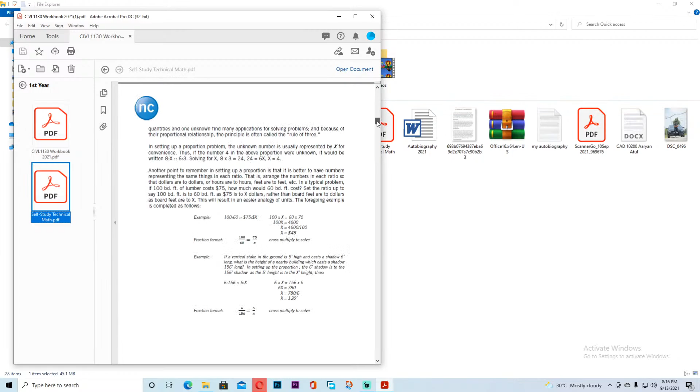They work for general contractors and subcontractors. Now, when you're working for an architect, you may not be using all the estimating skills that I'm teaching you here. You may be preparing drawings, but there's going to be many times in that role that you may be required to calculate quantities of material and calculate pricing. The other thing is, working for an architect or an engineer, you may be reviewing bids by general contractors, and you need to understand how that pricing took place.

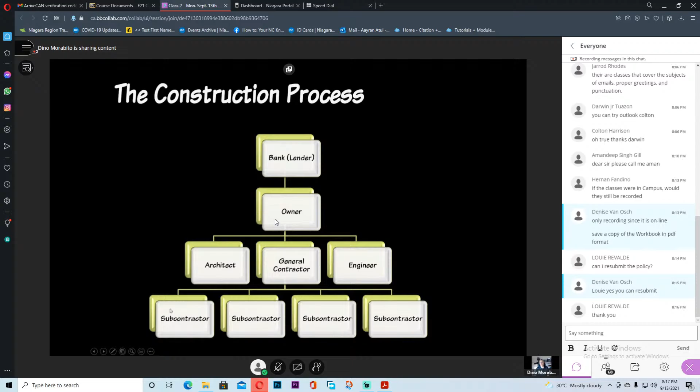So the skills that we're going to give you in construction estimating apply to every step of that chart. You can work for the bank, the architects, the general contractors, the engineers, or any of the subcontractors. There's always opportunities for us to work for any of these people in this project.

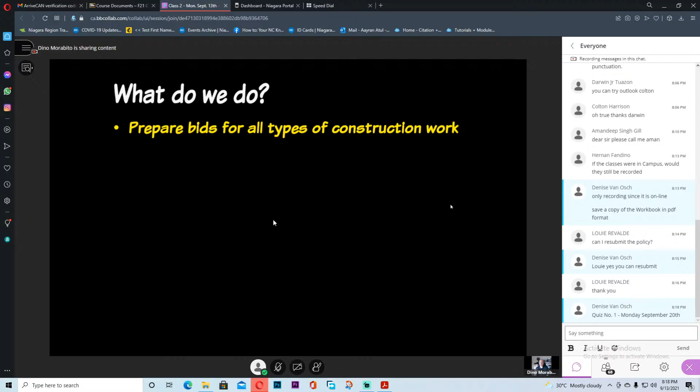Okay, what do we do? Well, what we generally associate as work with estimators is preparing bids. We are the guys who make an estimate, which becomes the bid for a project. In other words, the bid is a proposal that says we'll do the work for X number of dollars. But we also get involved with calculating the costs or the budget costs at the feasibility stage before the drawings are done, before the actual project is ready to start getting built. Someone may just be looking at a proposal and saying, hey, I'd like to put an apartment building in. How much do you think that'll cost? We can be involved in those early stages.

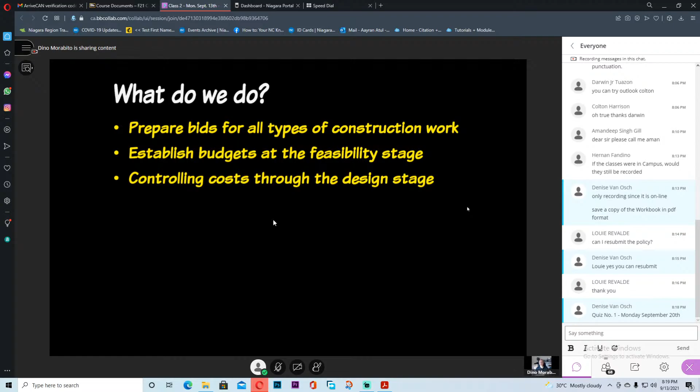When it's moved off the feasibility stage and is actually being drawn up by an architect, oftentimes decisions need to be made throughout that whole design process as to how much things are going to cost, and maybe if they cost too much, they might have to change what they're going to do. So we're involved with the cost in the design stage.

When the project is happening, we may be involved with monitoring the costs on the job week to week, month to month, to make sure that everything is staying within budget. And of course, we're always measuring quantities. Our skill set is to read drawings, understand them, and understand how to interpret that into quantity calculations.

When there are disputes, and certainly there can always be situations where there may not be full agreement in a project, where someone thinks something should cost a certain amount and someone doesn't agree with that amount, we can get into situations like that. We can get into situations where someone did a lot of extra work and doesn't feel like they're being paid enough for that work. So that's when a claim would be filed on a project. We can be involved in that process.

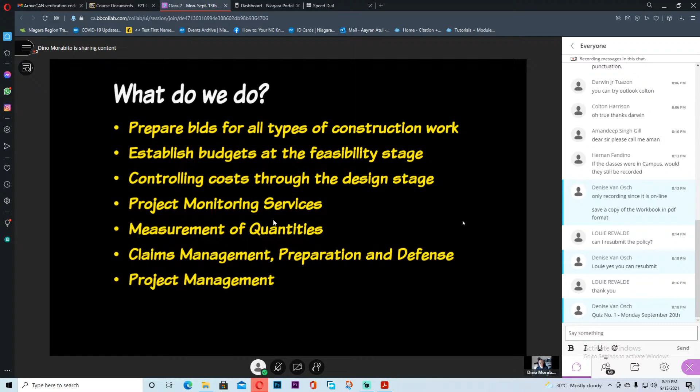Managing the project day to day. And when there's an argument or a disagreement between parties, and that could be between the general contractor and the architect, oftentimes when they're not in agreement with how much certain things should cost, a project could end up with someone saying, you know, we lost money, and we lost money because this certain party didn't do what they were supposed to do, and so we're putting in a claim for $10 million extra.

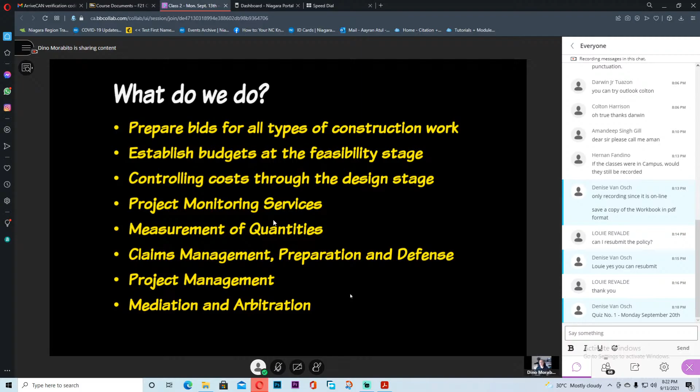Those claims need to be settled somehow, and there's a process called arbitration. In the industry, that's a process where instead of going to court, instead of being in a situation where there's been lawsuits filed and parties are taking each other to court, there can be an arbitration process where the two parties get together with an independent group, and that group looks over the submissions and makes a decision that everybody agrees to abide by. That's called arbitration. Oftentimes our skill set lends itself well to that because we understand numbers, quantities, and dollars, so we may be involved as an arbitrator, helping to mediate a disagreement between two parties.

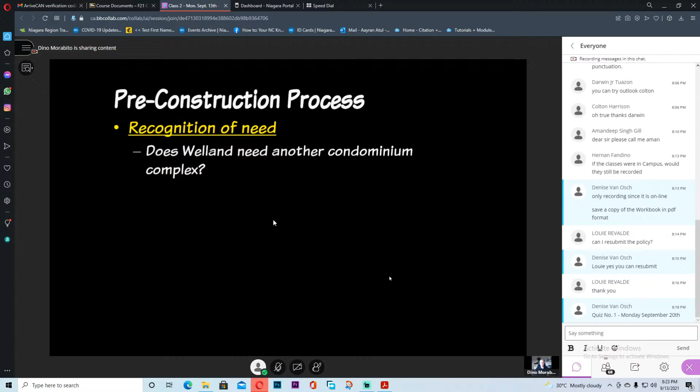So the pre-construction process has a few steps that happen before construction ever starts. The first one is recognition of need. Basically, someone has decided that there's a good opportunity to build a building. Perhaps near Niagara College, someone says, I'd like to build a large condo, and that's going to be a good residence for students to move into. So they've decided that they should do this, but before they actually do it, they need to find out whether it makes sense.

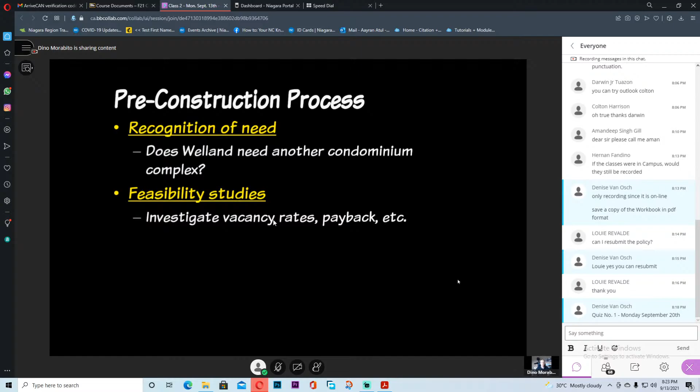There's a feasibility study that happens. They're going to look at it and say, what are the vacancy rates? Is there a very low vacancy rate? If there is, that means we could handle another student residence. But am I going to get my money's worth out of this? Is it going to take 50 years to get my money back, or can I get it back in 10 years? Does this make sense? So we have to look into the feasibility of whether this should be done or not.

Once we've decided that yes, it should be done, then we're going to go to an architect and get detailed plans and specifications. We're not going to do a project just based on sketches. It's got to be done properly, it's got to be approved, so we need to hire professionals to do that.

After that whole process happens, before any shovels go into the ground, the proper approvals need to be obtained. A building permit has to be obtained, and you have to make sure that everything is drawn, engineered, and designed properly to the building code in the city or district you're working in. It may be that you're putting in a building that isn't allowed based on the zoning for that area.

At that point, you may need to apply for changes to zoning bylaws, and that could turn into a process that really stonewalls your entire project. You might have done every single step up to this point, even have plans that are drawn and approved, but if you're not allowed to build that certain type of building in that certain area, you need to have that zoning change prior.

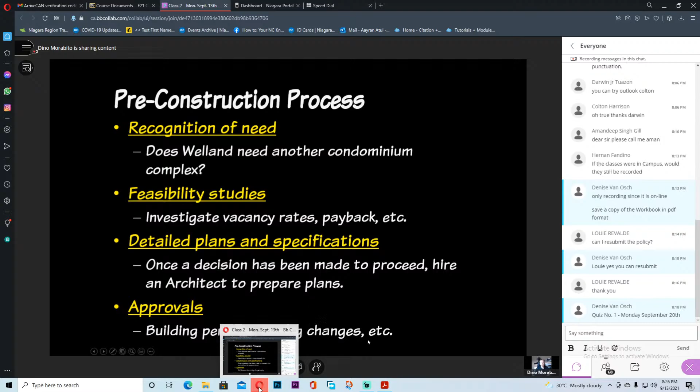Okay, so let's say we got through all that. Everything went great. We start the construction process, and the construction process starts with the tendering process, which is basically saying, okay, we've got all of our approvals in place, we have a set of drawings, now we need to find someone to build this. So we go through what's called the tendering process, and we accept a bid from contractors.

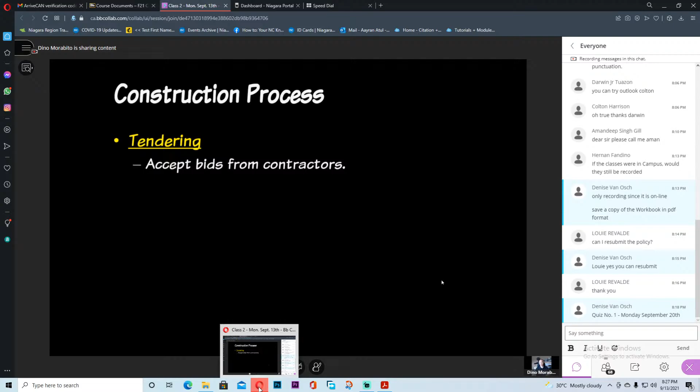Sometimes we need to pre-qualify those contractors before they're even allowed to bid. Sometimes we'll have a list of 20 contractors, and they're told, you need to prove to us that you're capable of doing this project first. In the end, there may be only 8 or 10 of those that actually pass the approval process, but now those that pass can all submit a bid for the project we want to do.

Once we've decided who we want to award the contract to, we're going to award them a contract. Logic says the lowest price. Why do I say maybe? Why would I not want the lowest price on a project? If I've got 10 bidders...

Good comments here, guys. Quality. One of the things about quality is I don't necessarily know the quality that they're going to build if I haven't had them build for me yet. So I don't necessarily know about their quality. And part of that pre-selection process, part of that pre-qualification process, is to make sure that the people who are bidding are quality builders. So let's presume they've all passed the pre-qualification, and therefore we know they're all qualified to do the work.

And Chase, you had a point that a higher price can possibly do it better. We don't know that for sure. Let me just hang that up.

There's a lot of things to consider here, but let me paint a scenario for you. I put a tender out for a project. I've got 5 bidders. 4 of them come in between $20 and $22 million for the project, and I get one bid that's $12 million. Now, if you guys were spending money, and you got the chance to buy something for $12 million instead of $20 million, wouldn't you want to spend the $12 million instead of $20 million?

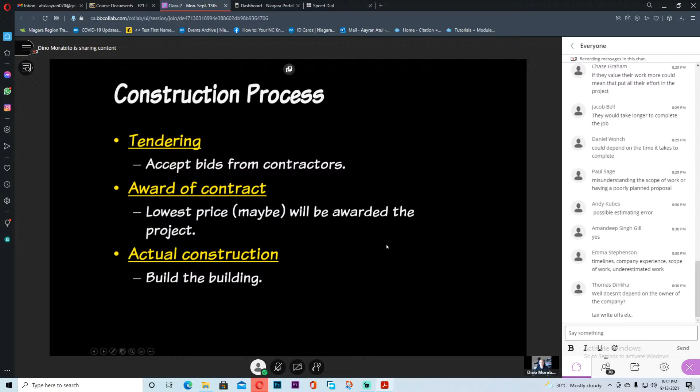And then the next step is, now that we've got a contractor that we want, we trust them, they're actually going to build a building.

Okay, we talked about a takeoff. We said we're going to do a takeoff. A takeoff is going to consist of some components. The first is going to be materials. Most of what we're going to do with you guys is calculate quantities of materials. Once I know the quantities of materials that go into a project, then I can figure out how much labor I need to actually build that project.

I can't do a labor takeoff without a material calculation. And once those two are done, then I can determine how much equipment I need to complete the project. So our final takeoff is going to include quantities of material, durations of labor, and durations and quantities of equipment.

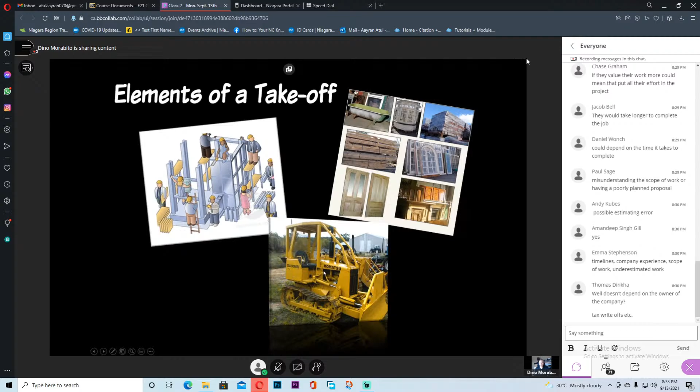When I finish, I take my takeoff, add pricing to it, and create an estimate. The estimate is the sum of the takeoff and the pricing, and that's what determines how much profit I make on a project. We're owning this business to make money, and we need to make sure we've covered all the costs and have a proper amount of profit in a project.

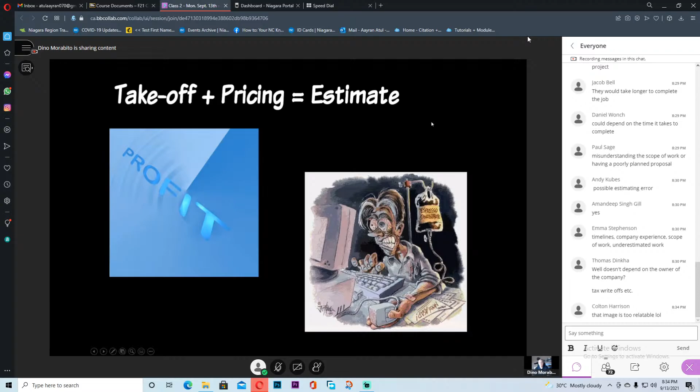I'm showing you a pretty stressed out estimator here. Colton, you can understand where that's coming from. It can be a stressful situation, and part of what can happen is we can make errors. What type of errors do we make as estimators? Math? Sure, we can definitely make mathematical mistakes.

We can make errors in just transposing information from a drawing. We read something wrong. We thought a concrete slab was supposed to be 4 inches thick, but it's supposed to be 14 inches thick. We wrote down 4, now we have a problem.

And omissions. There's a lot of things to consider in doing a bid. If we leave things out, that could be a big problem for us. How do we mitigate these errors?

Checking our estimates. Every single one of these errors can be fixed by double checking the work that we did in our estimate. As an estimator, oftentimes I'm going to need my supervisor, sometimes another estimator, but someone needs to check our work before we're done. So especially when you get into industry and you're a young junior estimator, you're going to do work on your own, but someone is going to check that work.

What you want to do is get into the habit of finding ways to check yourself. So in school, one of the things you're going to do is find a partner, someone you work with and get along well with, and you may end up doing some projects together as partners. And when you do, you're going to make sure that one partner checks the other partner's work.

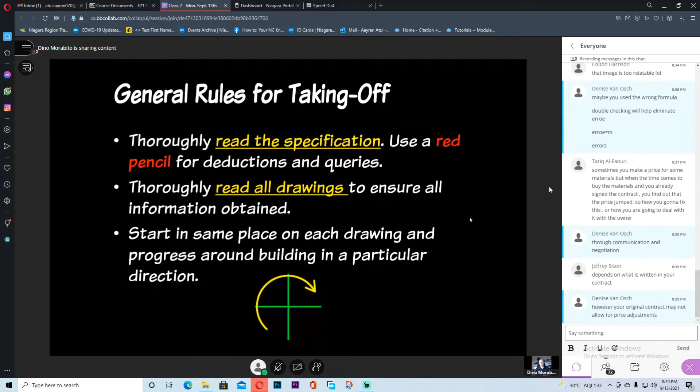As you complete items and get through your project, check off what you've done. There's nothing worse than counting doors or windows on a project, counting up 57 windows, and your phone rings. You answer it, have a conversation, get off the phone, look back at the drawing and say, now where did I leave off? Well, if you had checked off each of those 57 windows, and when the phone rang you wrote 57 beside the last one, you'd know where to pick up. So check off your drawings, mark up as you're doing the work.

And anytime you can duplicate something, take advantage of it. If I have the same thing twice, 3 times, 10 times, 15 times, make sure that you're taking advantage of any time you can duplicate things.

And you need to describe what you've taken off. If you write concrete, that might be great for you, but someone at some point has to order that concrete. They don't know what grade, whether it's 20, 25, or 30 MPa, or if there's anything special about it. If all you described was concrete, someone's going to come back to you as an estimator and say, tell me what you really want, because I'm the one responsible for ordering it. So get in the habit of fully describing what it is that you're calculating.

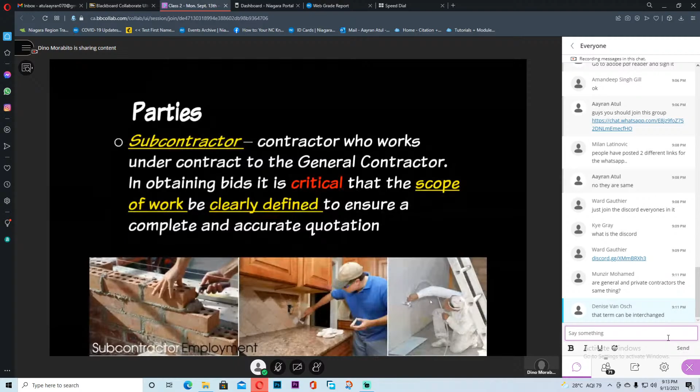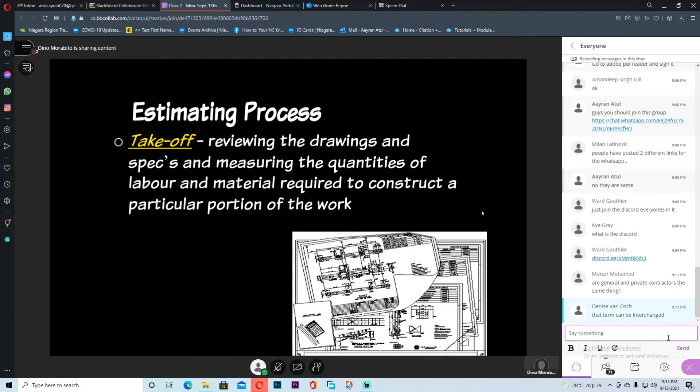The estimating process starts, as we've been saying all along, with a takeoff. Takeoff is reviewing the drawings and reading the specs, and calculating the quantities of labor and material required to do a job. So we take a set of drawings and turn it into an estimate. Here's an estimate worksheet with all the details of how much plywood and lumber and everything else we need, and it also includes a labor calculation of how many shifts or hours it's going to take to do the job.

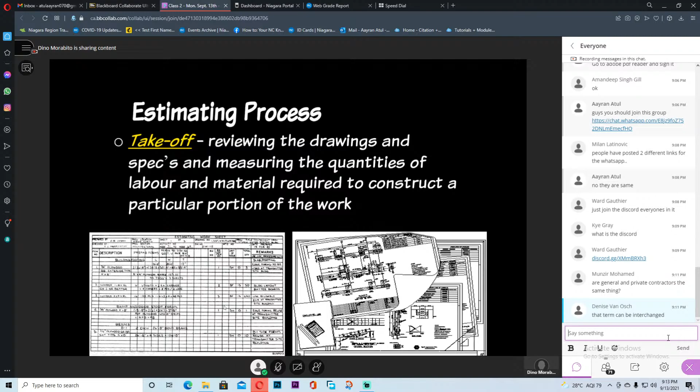The estimate is what happens when I take that quantity takeoff and put the dollars to it, put profit to it, and calculate a total cost for the project.

When I calculate material cost, oftentimes I'm going to get suppliers to either bid the project for me, or I'll use suppliers' price lists. If you've been here in Ontario in the last 6 months, you know what's happened to things like lumber - the price has jumped 4 or 5 times what it should be because of COVID and the problems that happened with it. Steel, both for rebar and structural steel, is also very volatile and can go up and down quite a bit. So it's our job as an estimator to ensure our material costs are correct, which may mean going to our supplier and asking them for a current price for the materials we're going to use on that project.

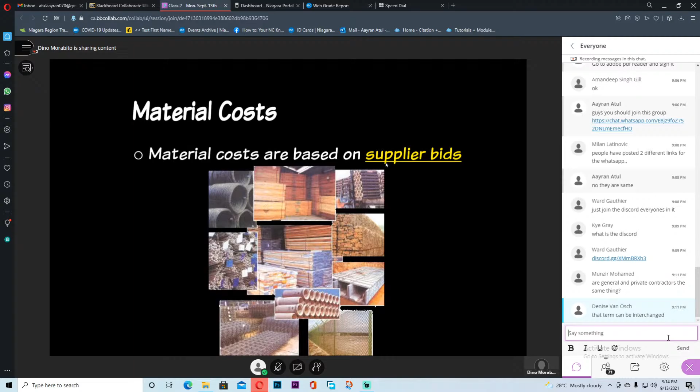We also have to calculate labor costs, and labor costs can be highly variable. When I talk about worker skill and productivity, we could be bidding a project where we don't have a lot of skill, maybe something new to us. It's going to take us longer to do that work than another contractor who is more skilled and does it all the time.

How do I find what the productivity should be on the job? Look at what I did last. If I'm building a certain type of building and I build 10 of them a year, when I'm finished I should analyze those projects and come up with a number - say, pouring concrete on this project took our 10-man crew 12 days, and there were X number of cubic meters of concrete. So I can say I have X number of hours for so many cubic meters. The next project, I analyze that one too. If I find the trend is that I'm getting worse, I need to correct that - though there may be another reason why I'm getting worse. The analysis of my past work informs how I should bid the next project.

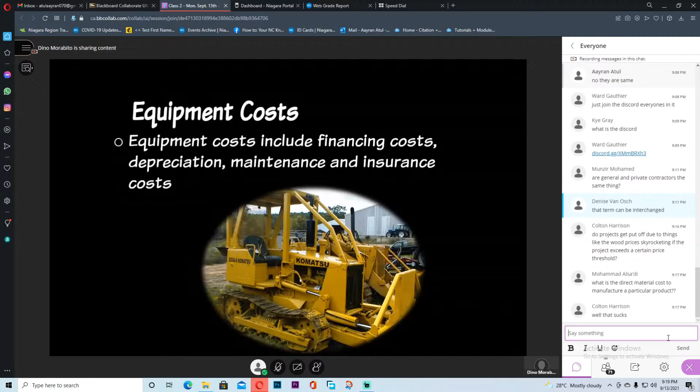It's important, and we're going to do our best to steer you in this direction and guide you, that we use a consistent process when we do our work. Why do we want consistency? Because it's going to lessen the chance that we're going to make mistakes.

And here's the important part: it's easier to transfer information to other estimators, project managers, or accounting staff, or teachers, the people who are going to mark our work. We want to give you the skills to put a consistent process together, so that when everyone looks at your work, they're used to seeing how you do this, that you have a certain format in which you work. Now it becomes easier for those people to check your work and spot if there's a mistake.

If you just write things down on a page haphazardly, you may find you're getting told to turn around and go back and redo it. Denise and I will get to a point in our marking where we may say this is not acceptable, especially if you're doing work by hand. We may just tell you, this is not acceptable, we're not marking this. You need to go back and put this into an easy to read format, which we're providing to you in order to make you conform to the consistent process. We're doing it for your benefit.

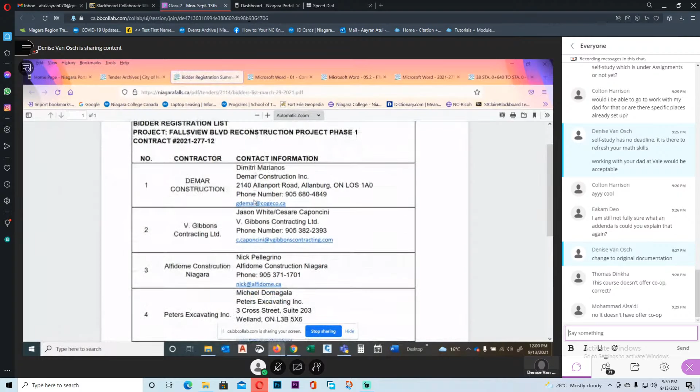There's a list of attachments that in order to submit your bid to this, you would have to go through. If we look at the actual, I'm going to look at the bidders list first. Okay, so these are all the companies that actually gave notice that they were interested in this project.

You'll notice that there's 7 of them, right? And it has the contact name for each one of them. Then you'll actually notice who the actual bidders were. And this one here is the official results. So on March 30th, 2021, only 4 companies of the original 7 actually put a price in.

What you'll notice is that the tender price, but there was also a corrected bid. This is where one of the ones where maybe as a co-op student or a freshly hired person at the city, you might go through and actually check the math from all of these submissions.

You'll notice that Centennial had a small error, only resulted in less than $2,000. But they each, when the bids come in, they double check the values, right?

You'll notice on this one, significant difference between the other 3. They were all in the millions, and V. Gibbons was just under $3 million. So they were awarded strictly based upon the cheapest. They did go for the cheapest, yeah. So that one is a bit interesting.

The other thing you'll notice is that there were 2 addendums issued. Okay, 2 addendums issued. And it's up to the company to ensure that they included those addendums. You'll notice addendum 1 and addendum 2.

But before we get to that, I want to show you the full specifications. The full specifications is actually 330 pages of information, right? That's a lot of info to have to work through. You'll notice that it's broken down into all kinds of different divisions. So there's a lot of information when we look at the actual specifications.

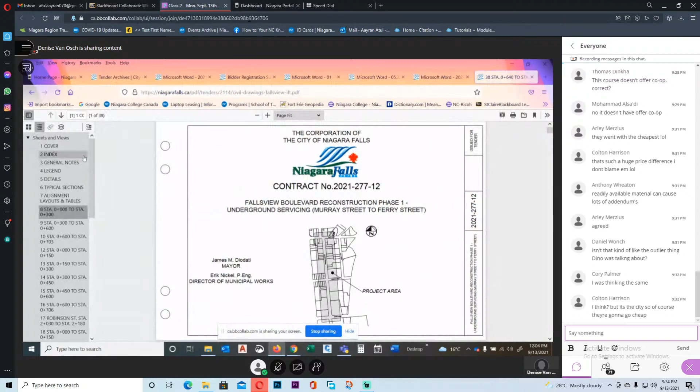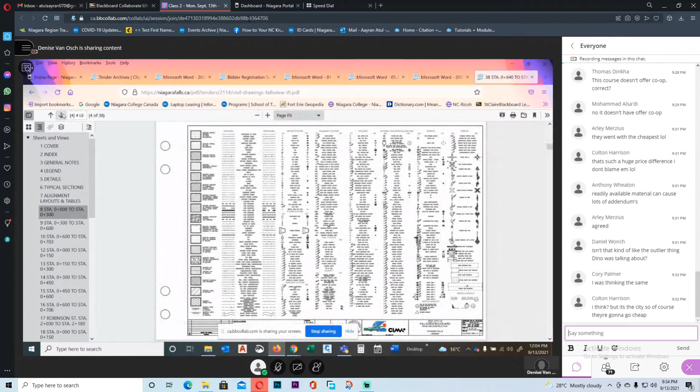And then I wanted to show you the drawings as well. Here's the drawings—38 pages of them. You want to make sure you are looking at the drawings themselves. We have an index, then it shows some general notes, then a whole legend about what different types of things mean on the drawings. Then we have typical sections and details, typical cross sections, the overall alignment page, and plan and profile drawings for specific locations along the roadway. So 38 pages—you have to not only read that 330-page document, you also have to be relating that document to the drawings themselves.

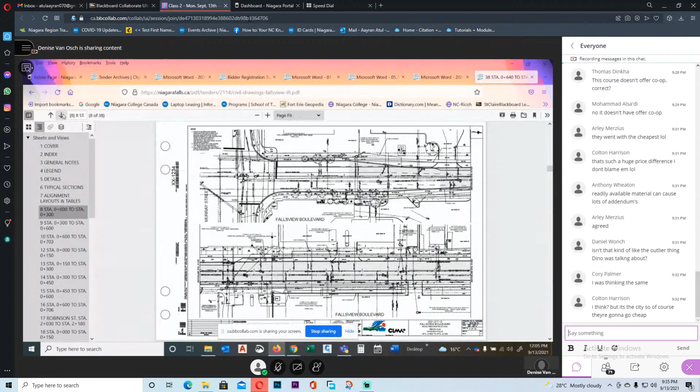So estimating is a very, very important part of the building process. I think that's all I wanted to say, Dino, unless you wanted me to go to something else.

Can you go to the form of tender? Yep. I'm not sure which page it is. This one? No, just scroll up. You want me to go to page 1? Yeah. And then just scroll down. I think that—yeah, keep going. So let's stop right there.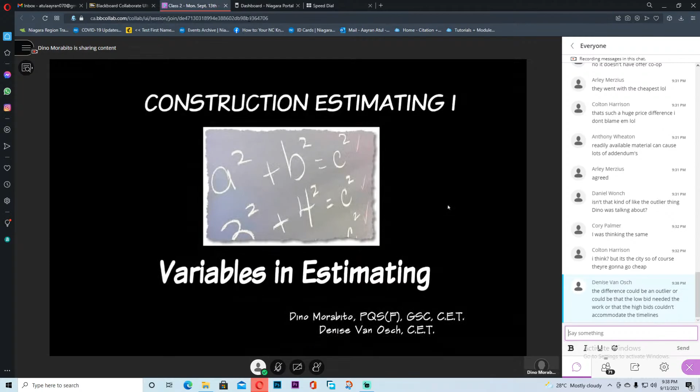All right, let me jump back in. We've only got about 10 minutes left, so I want to zip through the last portion of the lecture, which we should be able to do pretty easily. Okay, the variables that we'll deal with—I'll go through this quicker.

What's variable? What changes on a project? Labor availability and pricing—I need to make sure I'm using current labor rates if there's a union contract, and if I'm working in any area other than where I live. In other words, I'm a contractor in Niagara, but I'm doing a project in Toronto. Toronto labor rates may be very different than what they are in Niagara. I need to know that.

The project location—if I'm working down here in the wintertime, no problem. If I'm working in Thunder Bay in the wintertime, I'm definitely going to have to think about that.

Material availability—we talked about lumber and steel; those prices can change drastically. Subcontractor arrangements—one of the things that could happen is I may have to work with subs that I don't know, that I've never worked with before. I need to know who they are and what their capabilities are.

What is it going to cost for overhead? When I talk about overhead, I'm talking about expenses for a project that aren't directly related to the job. For instance, a job site trailer is directly related to the job, but the salary for you as an estimator is not. That's part of the overhead, the cost of running my office and employing estimators and drafters. Those are overhead expenses, and I need to be accurate with that.

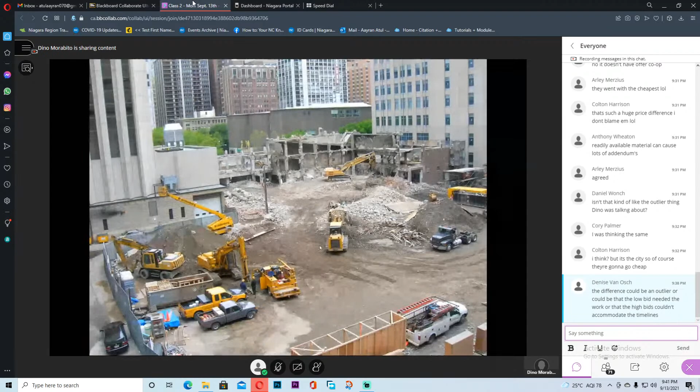Talking about site conditions, here's an interesting picture. There was a building here, and you can see how close it is to the one right beside it. So if I thought I could just run in and start knocking this thing down, or use explosives to drop the building, I had to think twice because of the site conditions. When I got the drawings for this job, they didn't show me the buildings on either side, only the drawings for this building. I need to be aware of how close the other buildings are and how I'll actually be able to do this job because of what's beside me.

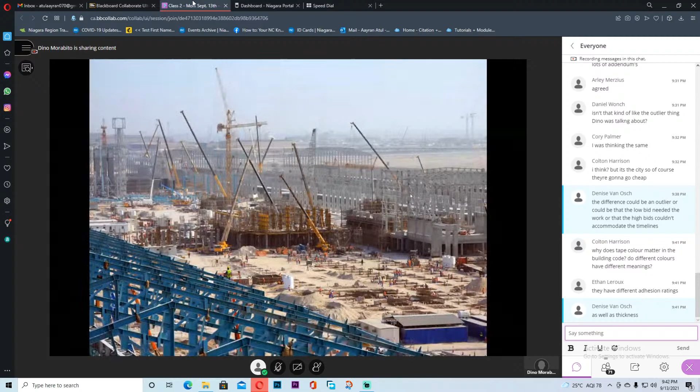Here's an interesting job site. I'm not sure where this is, but just to give you an idea of the scope, that's the people - you can see all the workers on this project. And the crane rental companies were awfully happy with this one - look at the number of cranes, big tower cranes, and it goes all the way around to the other side. There are cranes all the way through this project.

There could be things on this project that can turn into hundreds of thousands or millions of dollars when the project's over. For example, the parking lot for all these workers might be way over here somewhere. So knowing the site conditions, I may have to price into this job the purchase of a couple of buses and pay full-time bus drivers to bus all these guys over to where my site trailer is, because they literally cannot park close enough. This project might be a 3 or 4 year project - imagine the costs over 4 years of a couple of buses and full-time drivers working every single day, plus gas and maintenance. So knowing the site is critical to putting together a correct price.

The construction systems we're going to deal with give an overview of what's going to happen in this course. We're going to talk about frame construction, basically wood frame construction, which applies mostly to residential construction. We're going to talk about structural steel and learn how to calculate quantities and prices for it. We're also going to do a lot of concrete work, and we'll cover masonry construction. These are pretty much the major types of construction systems we'll see in industry, covered in the 3-year construction engineering course. In the 2-year civil engineering technician course, we won't cover things like structural steel or masonry, but we will definitely do some concrete work.

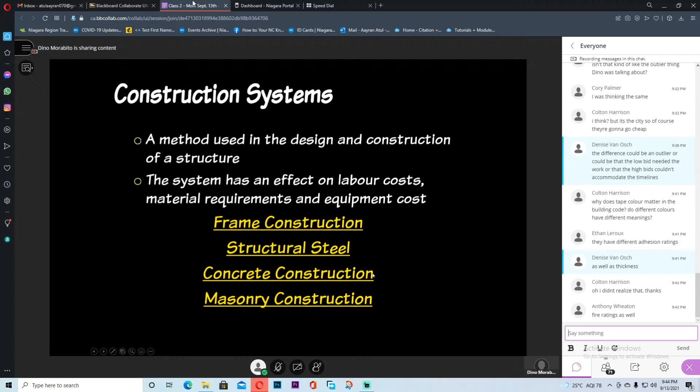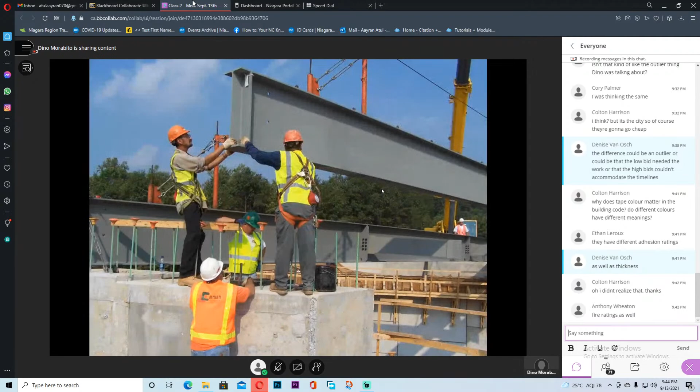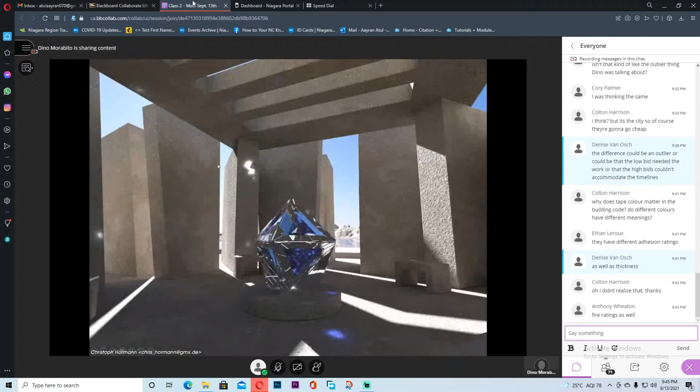When I'm looking at concrete, this is a nice example. This is some very beautiful concrete work that, obviously, is not the norm we're going to cover, but I just like the picture, so I put it in.

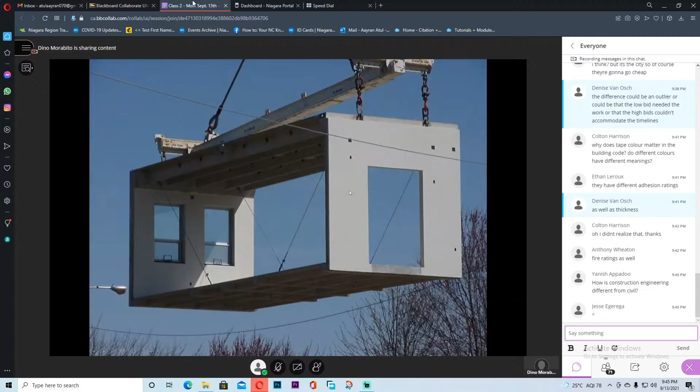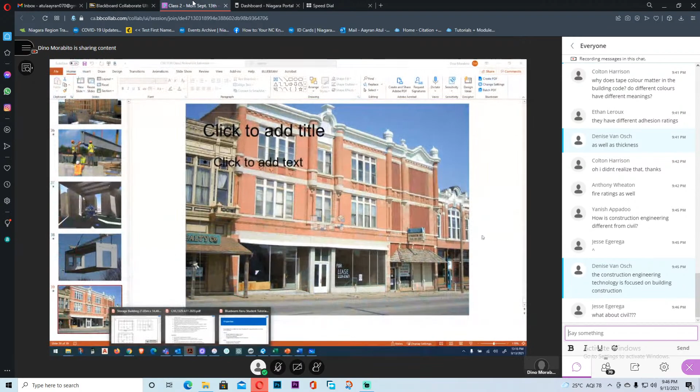Let me just escape out of there. What I want to do is spend just a couple of minutes before we finish with our... close that. Come on, where is it? I just want to open up the workbook. As soon as it decides that it's ready to open. There we go. Okay, first year workbook is here.

Civil 1130. And I'm going to open that document. Oops. Okay.

So I just want to quickly look at it. You guys have this workbook, okay? And a whole lot of what I just talked about is in this workbook. This is interesting. This is just a bit of words of wisdom about where you're at when we're in school now.

Here's the links to all those videos that we talked about. And here's some of what we just talked about, okay? Here's some history of what a quantity surveyor is, but you're going to eventually see, look, this is similar to what we just talked about, the pre-construction process, the construction process. So when you need to rehash what we just covered today, you're going to see that most of this is in the workbook, okay?